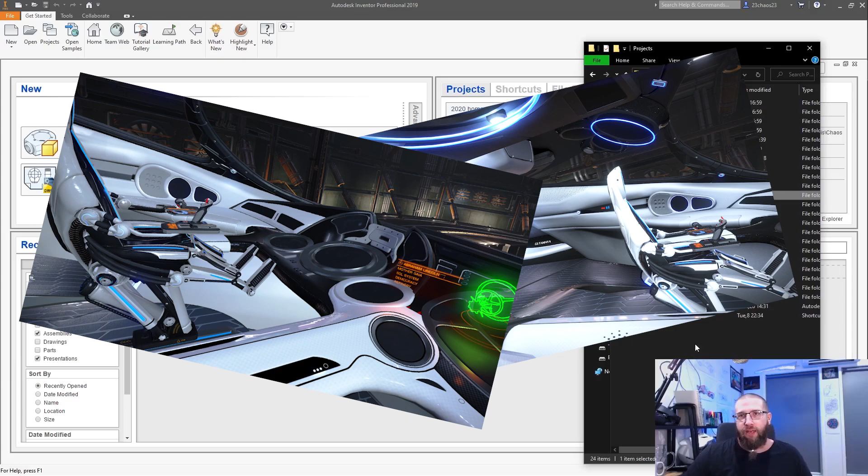I might build a rocket at some point in the future, like a model rocket, goes psh, lots of fun. There's other stuff like I wanted to build a gaming chair that looked like the Elite Imperial Flight Chair out of Elite Dangerous, but I'm not going to do that anymore because I've got a perfectly good chair. And why do stupid shit like this? This is a waste of time. I should probably delete this folder. You know what? Bye. Go away.

But we do have this folder. Now, in this folder are all of my ideas for concept planes, that sort of stuff. If it flies, it goes there. This is the Chaos Volatilis. Volatilis is like a Latin word for like flying or floating or something like that. I don't know, go look it up. I did, I've forgotten, but I don't care. It's a cool name. So in here, there are a number of things. Let's go have a look at them.

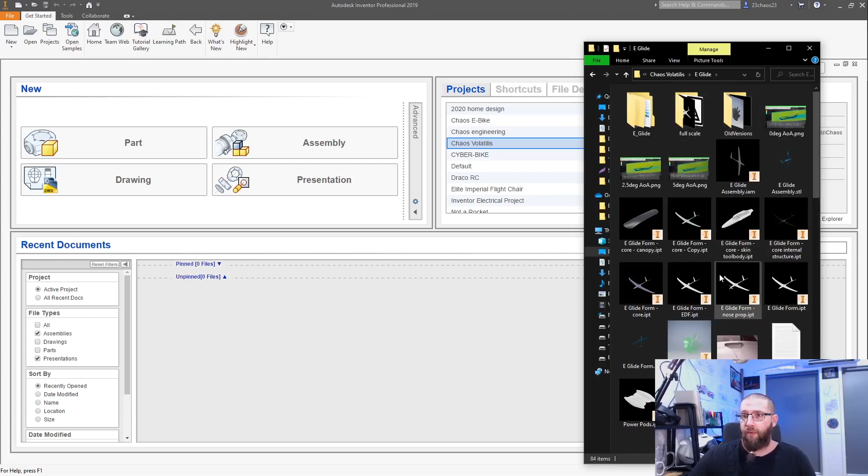The first one I want to talk about is the E-Glide project. If you follow me on Twitter, you would have seen this project, something I'm really interested in actually doing. I've got a number of different versions of it here. So when I finish with the Draco build and I move on to another project, I mentioned in yesterday's episode, one of those projects could be a simpler RC plane.

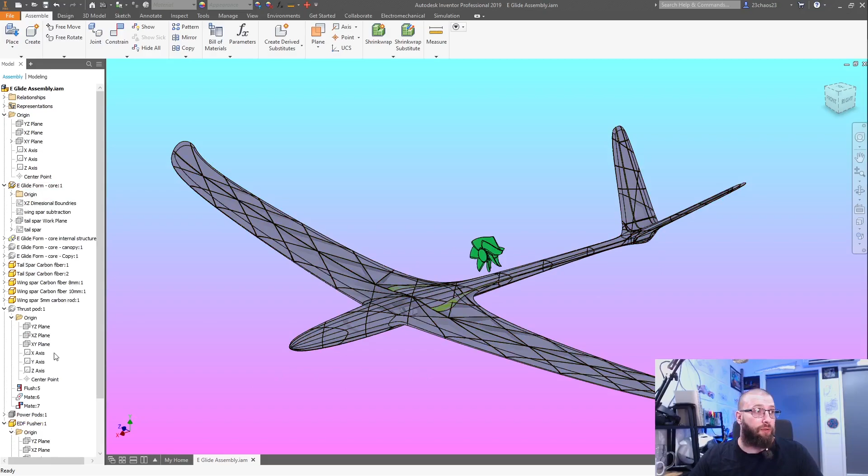I would like to do this, right? This is a glider concept. It comes with an optional thrust pod type thing. This would be a lot of fun to do. I don't know where you'd put the batteries for this EDF, but that's a future problem, don't need to think about it right now. I've designed this at the moment with a rib substructure, very similar to what you would do for regular 3D printing. So this would probably work for both resin and regular 3D printing.

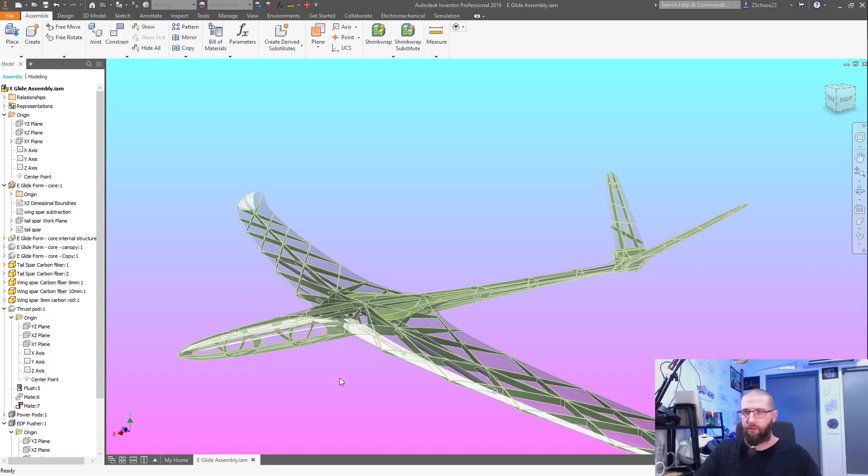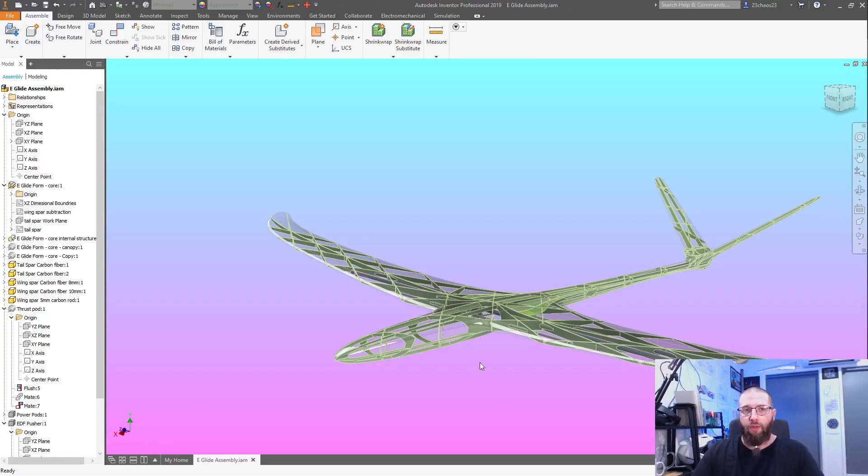A couple of the reasons why I don't want to do this as the next RC plane project is because this one is a bit near and dear to me. Like this is a pet project of mine. I want to make this really good, so it's not something I can just like quickly throw together. It's not a simple project that anyone can do. This is going to have some pretty interesting stuff in it, so probably not going to work on this. But I thought I'd just give you guys a quick view of it and show you what it looks like, what it is. It's just a V-tail, slope soarer glider type deal.

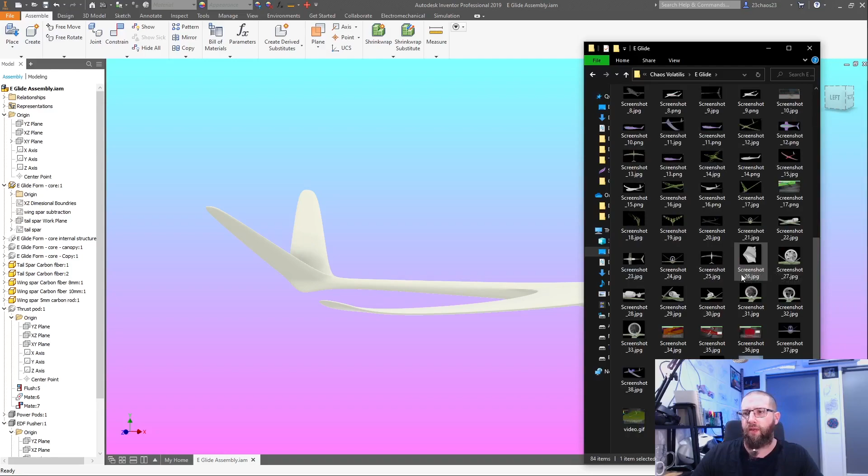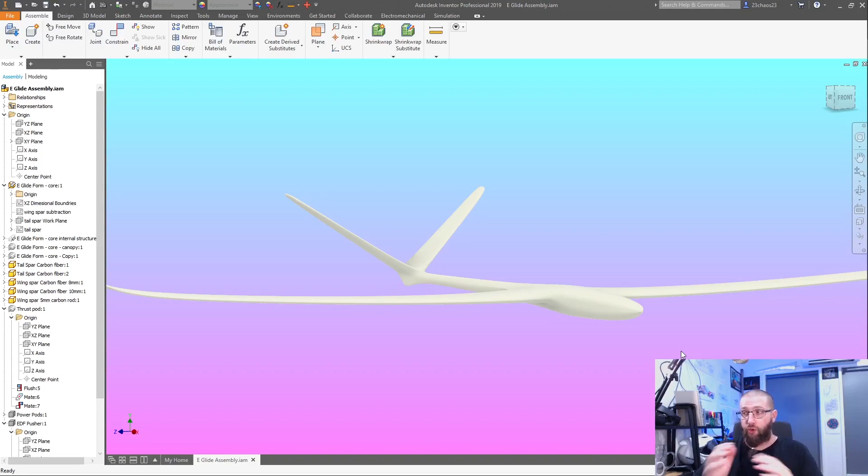So yeah, this is one of the things that I have in store for the future, but not for a while. Okay, like this is my baby. This is going to be like, it will be for sale. It will be available for people when it's finished. But this is going to be a bit like the Draco. It's a bit more of an enthusiast build. It's a bit more time and energy that goes into building it, putting it together, getting it to work nicely. So that's for another day.

So what else have we got? Let's have a see. Something that would be simple, right, for an RC project.

I'm more than likely going to do something completely new for this next RC build, starting from scratch. It'll be sort of a collaborative effort between me and you guys. We'll discuss it, maybe I'll make a forum post on the Flite Test forums or something. Let's have a look here.

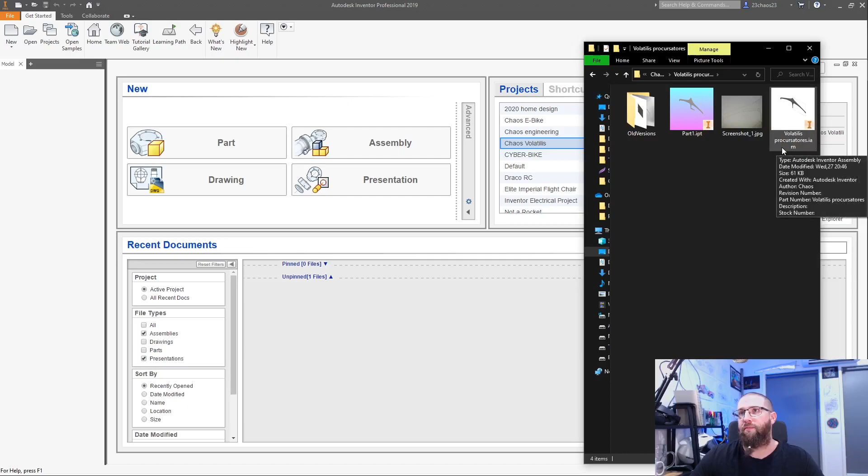The Volatilis procursatores, I can't even remember how you pronounce that. Let's open this up, I'll just open the screenshot since the 3D file is garbage. This was the sketch I made for it. It's almost a delta, but it does have a V-tail.

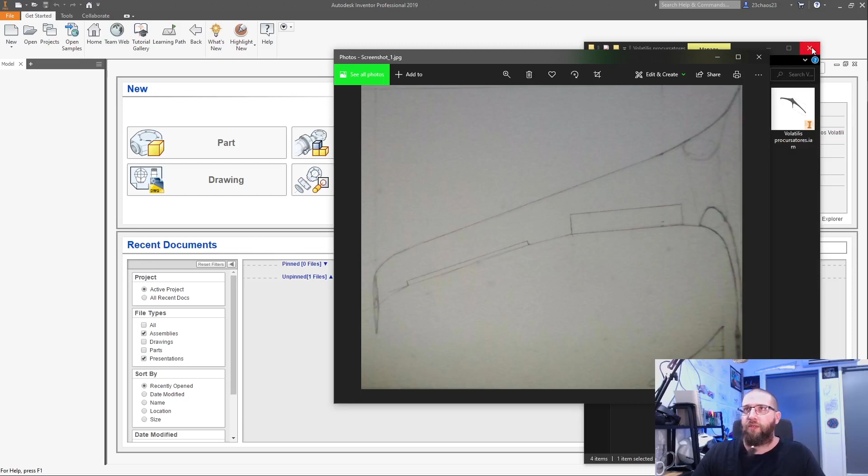This was one of my early concepts for the E-Glide I just showed you, but this would have twin EDFs built into the fuselage near the core. I don't want to go EDF for this next RC project though. I mean, we could, but I want to put a simple prop motor on it, make it a nice little simple flyer. Thinking maybe a Delta or something. We'll see.

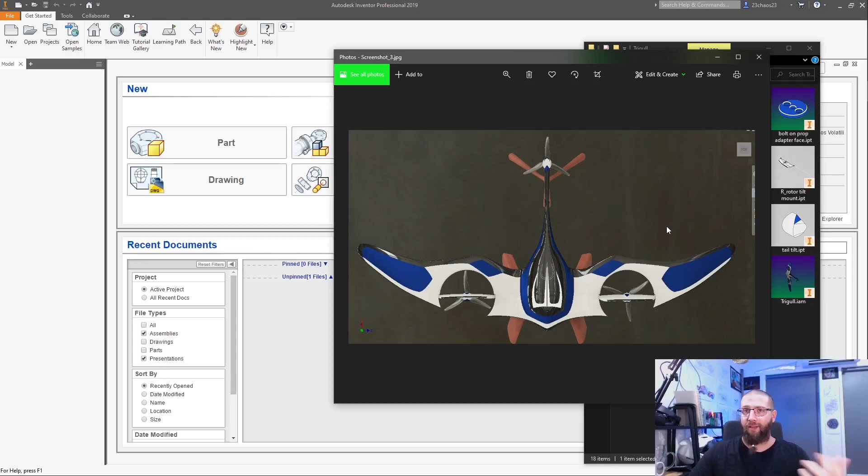What else have I got in here? You've seen this on my YouTube page or Twitter bio. This is the Tri-Gull, a multi-rotor, a tricopter that also transforms in flight. This is something I'd love to do, but it's a bit outside the scope of the RC project I'm thinking of.

It needs to be simple, sort of like a beginner level thing, because I'll be creating files for both resin printing and FDM printing, and I need to get my FDM printer up and running to test those files, which is a whole kettle of fish I don't want to think about right now. So I'm going to try and keep the whole scope simple.

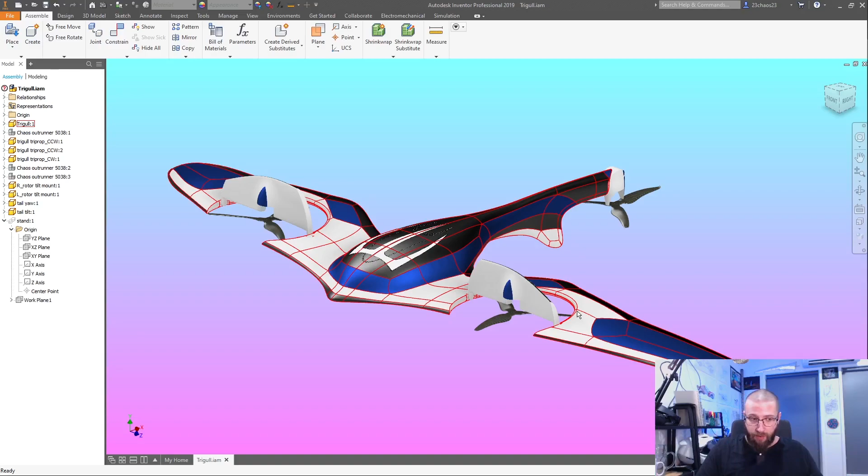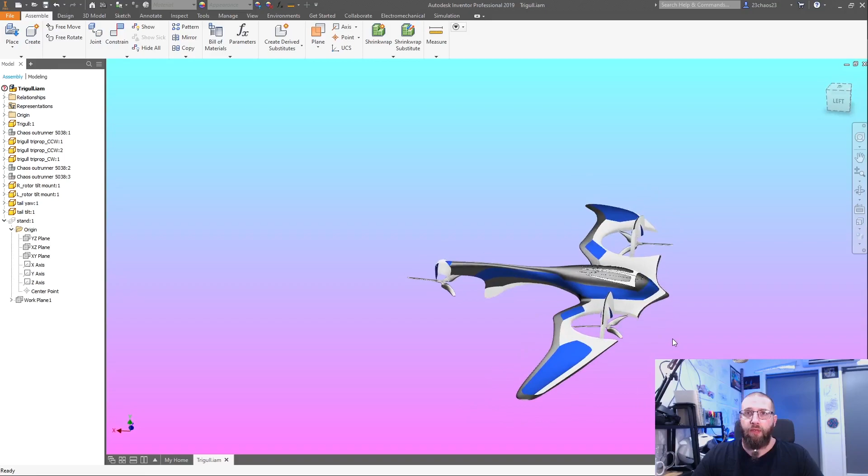But here's another one of the designs I've worked on. I will definitely be building this thing at some point. It's a flying penguin, look, it's got a penguin beak. I love this thing, it's one of my most favorite designs I've worked on. Definitely going to see this happening at some point, probably next year. It's going to be an expensive build.

Lots of moving parts. Like, for instance, this tail moves like this. There'll be a hinging system for the cables that go in for the motor. And then it also turns along this axis, so you get... I've just separated it here, and this will have another tilt, which gives you your tilt.

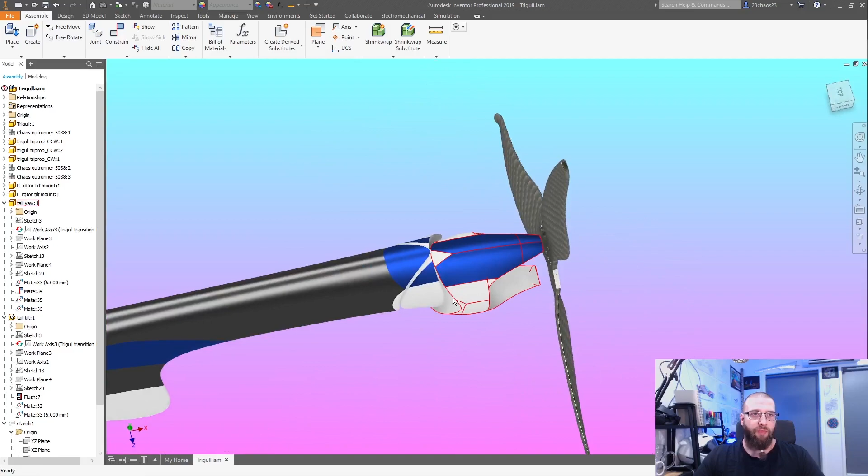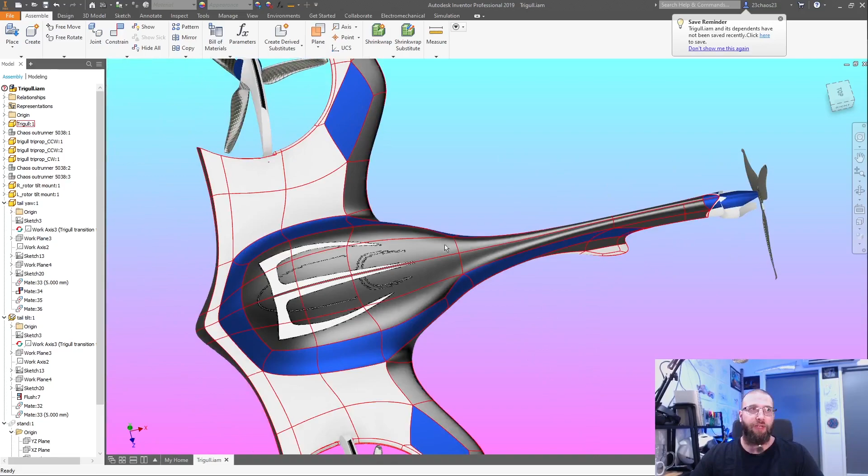So when you're in vertical mode you get the tilt for the rear rotor, because on a tricopter you have a servo that moves your tail rotor. Then when it's in level flight, it switches to being a yaw action for a rudder, so you get thrust vectoring control like that, and also thrust vectoring control for these forward props.

This will be a lot of fun to build, but very complicated. It's going to require a lot of custom technology, especially developing the code to switch from a tilt rotor to forward flight. I'll need to find people online who've done something similar already, and probably start a collaboration or discussion on how to make that work. So that would be a lot of fun, but a little too complicated.

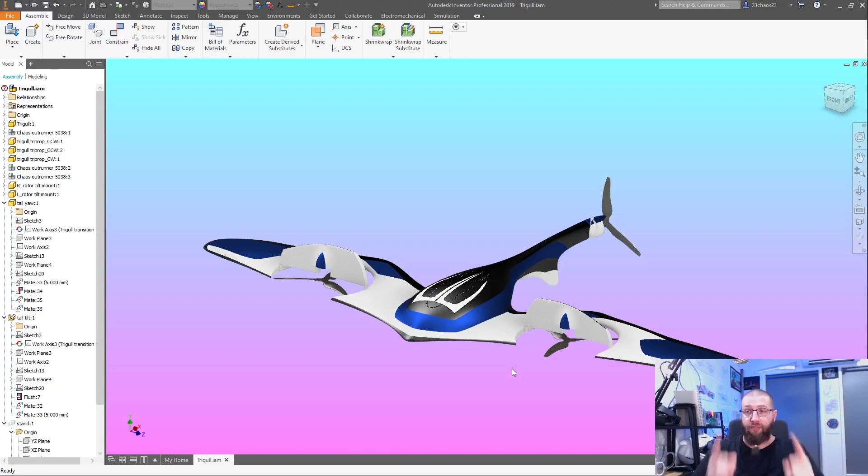Let's see what else we've got, quickly blow through the last three. This is the Chaos, what did I call this, Libertas. This would be a twin EDF with a forward canard. This one will be a lot of fun. I never really got this design further than the sketch.

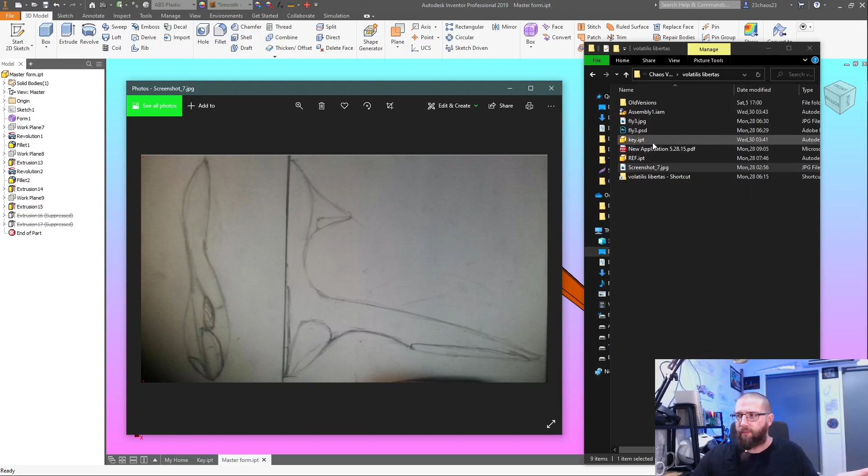I did start an Inventor file for it but never finished it, because some of the shapes around the EDFs and the wing I wasn't happy with, and especially when you go from a sketch to a 3D model it doesn't always work out the way you want. I'll probably work on this design at some point too, but let's not go there, it's not good enough, I'm not happy with it.

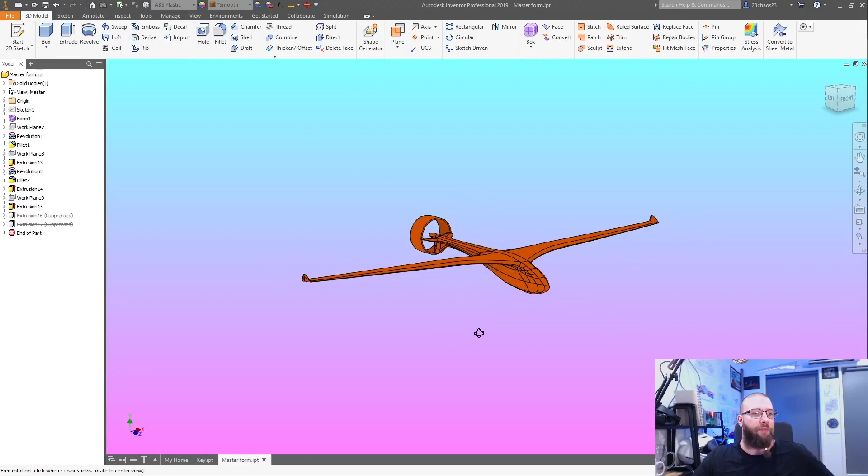Something else I've got, this is the, what did I call this, the Nephele, like the Nephilim, so like an angel or whatever. You see there's a common theme in my designs, sort of a gull wing shape, like a gull's wing. A lot of my designs are very inspired by nature.

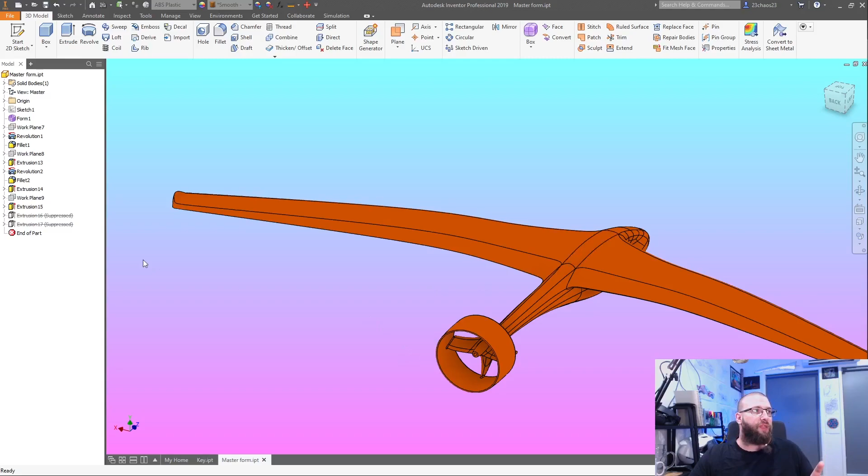This also has an EDF, but the advantage here is that the EDF is quite large. Let me grab the measuring tool, get a measurement in here, 124 in diameter, so that's a pretty big diameter. You can put a prop in there, and that's what I did, I designed this to actually take a prop. You can see in this photo I designed it to have this sort of prop, so I can design a custom prop. Yeah, it's technically an EDF, but this is within design scope.

You can 3D print this prop. Whether you can 3D print it on a plastic printer is another story. It should be able to, it's quite thick. This should work. This design though, I wasn't sure if these elevators would work right in front of an EDF.

I don't know if the aerodynamics works for that. I think these would have to be on the back side. I don't know if elevators would work here. Not sure. Also, same thing with the rudder. Putting the rudder right there in front of the prop affects the performance of the prop. So probably not a good idea.

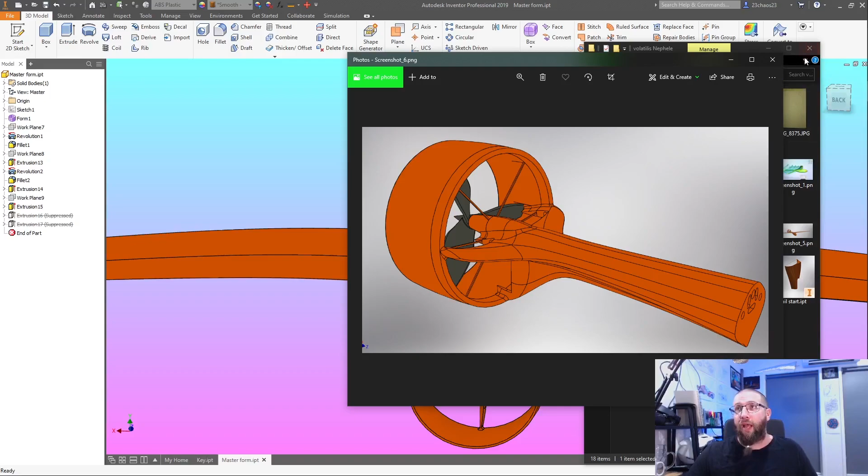So I don't know, but I actually got quite far with this design. I usually make a master form, which is the entire solid shape. And then I go in and start making individual parts. You can see here's a sketch of the wing section.

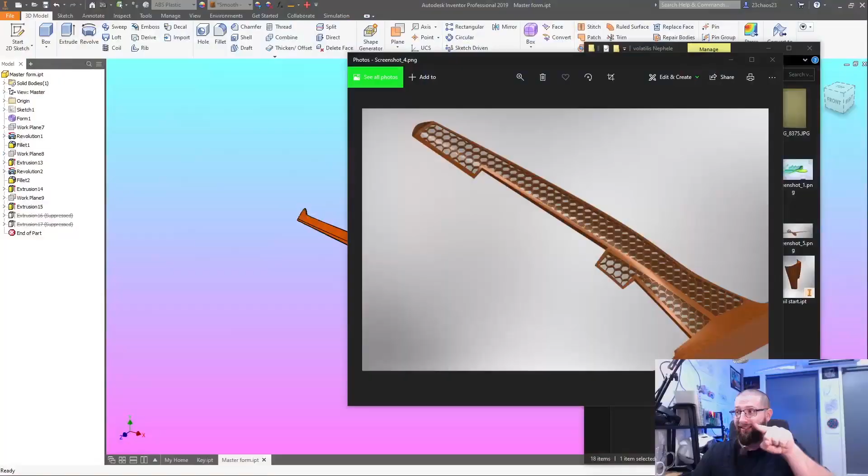Now this is garbage, I won't be doing it like this. This is too heavy. I was really naive back then when I did this. In fact, you can see this wing right there, that's this, so it was 3D printed. And that's how I know it was too heavy. It was a shitty design, really shitty design.

So yeah, there's that one. We might work on something similar to this, make a modified design of it. As you can see, I always do fluid sim tests on everything. This is a previous design of it without the prop. You can see there it has a twin vertical stabilizer. That was quite cool, I quite like that design. But then where do you put the prop?

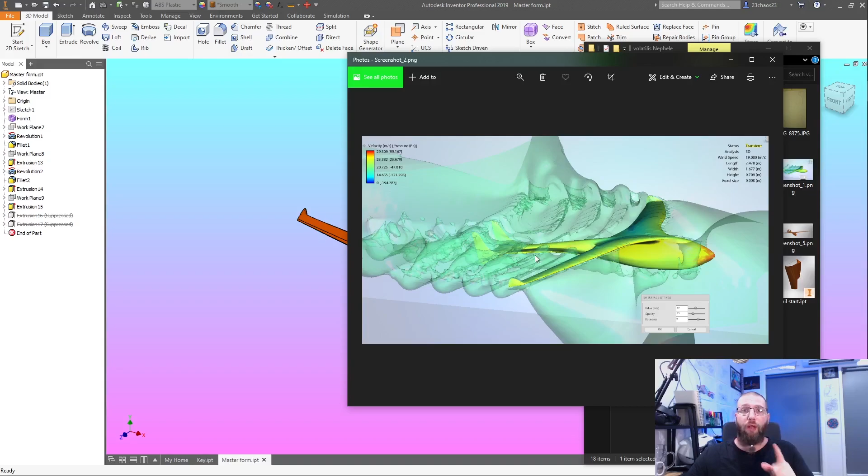So that died. Moving on, this is the Monogull. It's a little bit inspired by the Trigull, but instead of having 3 motors, 3 props, 3 rotors, whatever, it has 1 EDF in the middle. I think this is pretty cool, but again, it's an EDF.

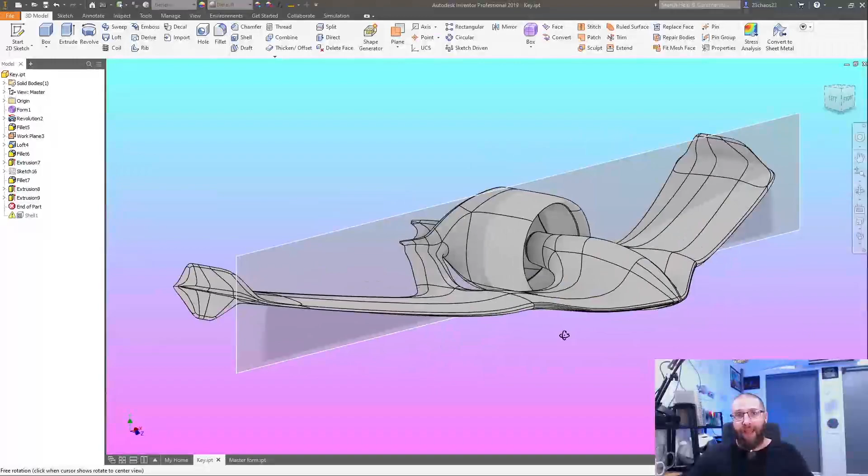Some of this is going to be pretty complicated for 3D printing and stuff. Leave your comments down below please, just say I want to see more of this plane. I've got a bunch of screenshots and stuff of it here, but it's better just to look at the 3D model. So this would be a lot of fun.

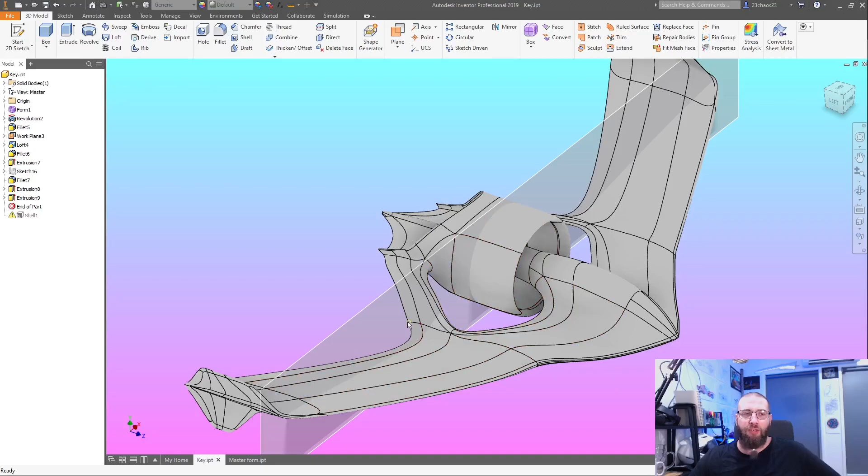Again, it's an EDF, I need to stop doing EDFs. I just love EDFs. But I think there's some interesting aerodynamic issues with this. I don't know how well it would fly. It would definitely be a lot of fun. It looks fast, but I think it's going to have a lot of drag.

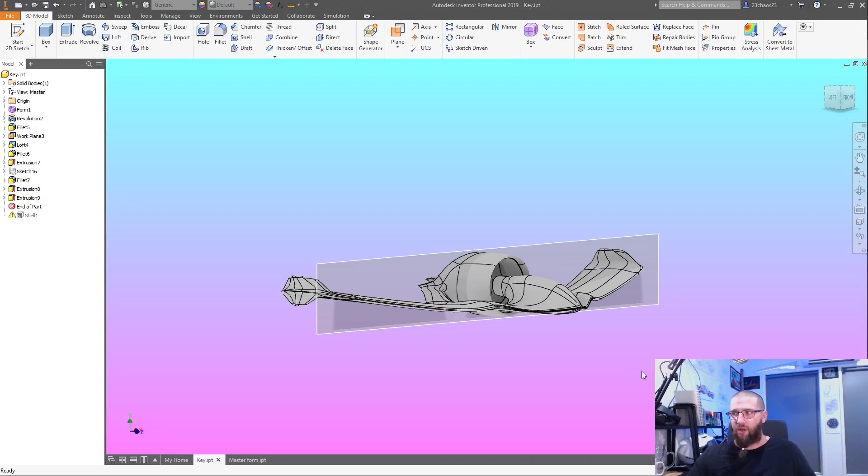There's a lot of improvements I need to make to the design, some of the wing thicknesses and stuff. Like this hump here, I don't know what I was thinking. That needs to go, how do you get a spar through that? Yeah, so a lot of these designs are years and years old, made way back. What else we got? That's it.

So there you go, just been a quick overview of the stuff that I've done in the past. Some of those are just years old, I don't see myself going back to them. But what they did do was teach me a lot about designing planes from scratch, just from simple sketches, bringing your idea into a form and seeing how it then looks in 3D. Through that, over the years, I've developed this ability to just do just about anything in CAD.

It literally just comes down to practice, trying something out. You're not always gonna get what you want. I've got a folder full of stuff that isn't complete, that isn't done. All it is, is learning, trying stuff out. Practice, practice, practice, just keep doing stuff and you get better. It just takes a long time with anything, but it's worth it, so stick to it.